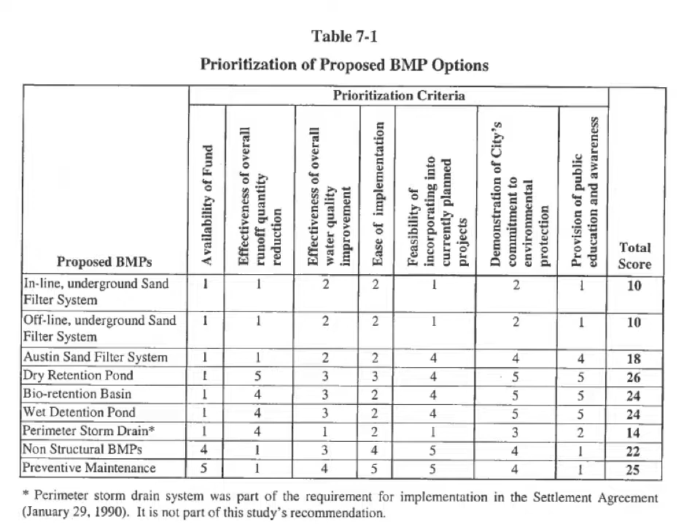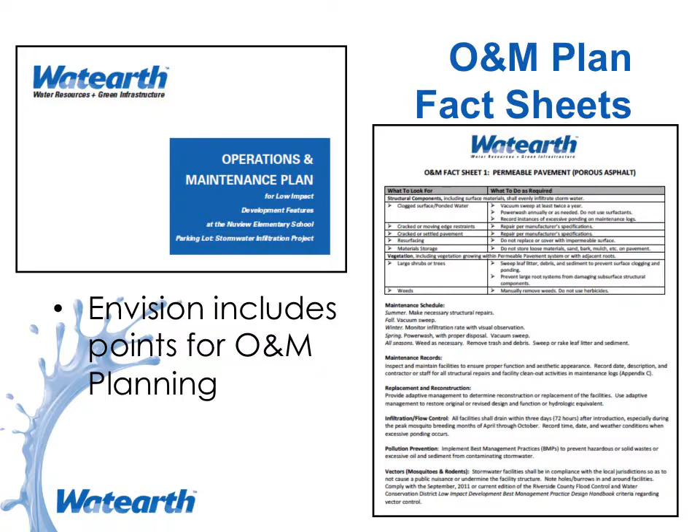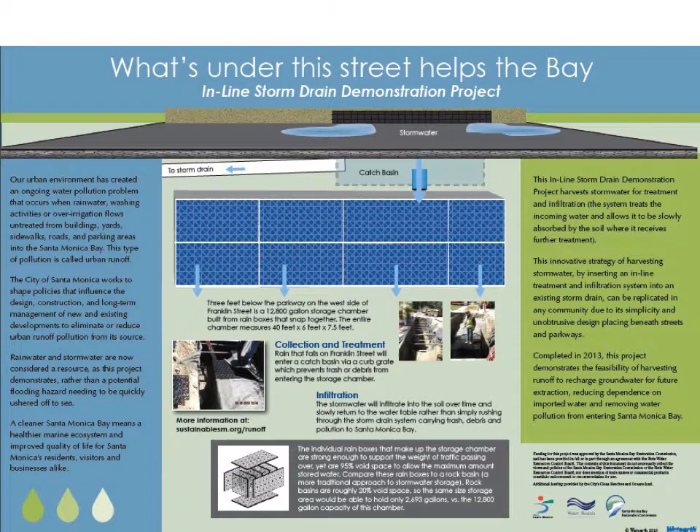This was for the City of Santa Monica for their BMPs maintenance manual. And so BMPs can range from, this is underground storage. This was done as a grant and demonstration project. It's below an inlet within the road right-of-way. And so it's manufactured storage cubes that retain water. So this is one type, and I'll show you a couple more examples, but this is one type of underground product that could be used in the Africa area to store the water to make up the river flow. This is a manufactured dry well, so it has some storage in it, but the idea is infiltration.

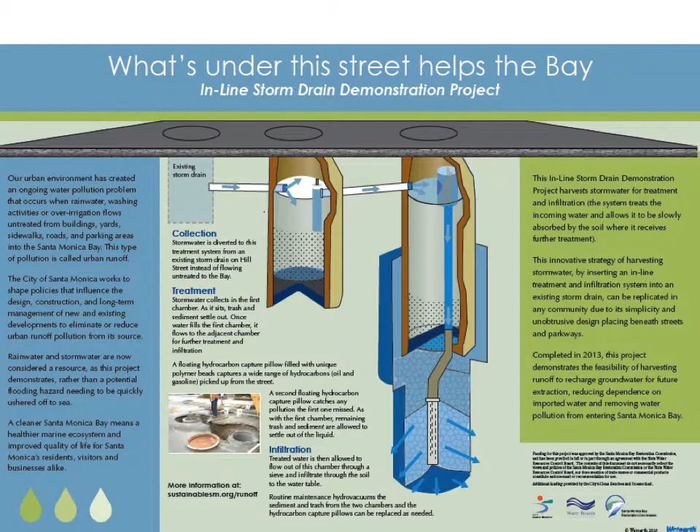How do you keep the permeable pavement permeable? Well, you have to do maintenance. We've actually had a couple of clients turn around and go forget about it, because the best thing we could find was like a billy goat. It's got extreme suction on it. But in time, the permeable pavement clogs up with all the fines and is no longer permeable unless you have something that's strong enough that can vacuum. Yeah, you have to maintain it with like a vacuum sweeper.

And then periodic. So depending on where you are, like cold parts of the country that have snow, generally there's going to be more times. If you have a heavy sediment load, you'll have to maintain it more frequently. Otherwise, once a year, twice a year, quarterly, vacuum sweeping. You think it can remain permeable? If it's properly maintained. Not like forever, but nothing's forever.

I mean, it can remain permeable unless it's in an area of a super heavy sediment load. Then you want to either not put it there or build in other pre-treatment BMPs, or have a redundant system where you know it's going to do its job. You know there's a lot of sediment coming in. You're going to maintain it, but you also have the overflow go to a different system kind of thing.

Yeah, so permeable pavers in the parking stalls here. Where's that? This is also in Santa Monica. I think it's at Virginia Park. So here's a sand filter under construction. So it's underground. It does an okay job of removal, but again, it's not going to provide other benefits like educational opportunities or aesthetics. So wet pond was one of the items.

Well, the other thing we found too is recovery. A lot of places we work with, you have 6 inches of rain in one event. So that field won't be any good for the next 3 days, because you have to get all the water moved away, and then the field has to dry enough to where it can be used. So it's a great dual use, but like everything else, something that does 2 or 3 things probably doesn't do it as well as something that just does one thing.

So yeah, I think that's probably true for the detention basins with recreation, but bioretention has so many pollutant removal processes and then provides the aesthetics and habitat. That's really my favorite. Yeah, the best BMP.

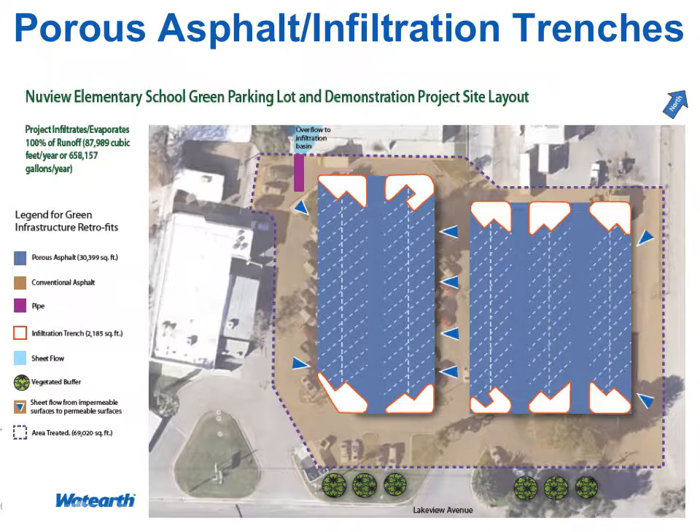So this is out in Nuview, and basically it was a parking lot. So similarly to the parking lot here, we retrofitted it, but the emphasis was on permeable pavement, and they wanted infiltration trenches rather than bioretention. So it pretty much infiltrates 100% of the annual runoff and also the 100-year, 24-hour event. But there is an overflow built in out into a play field, just in case.

So the one construction issue, we didn't do construction inspection on this. The prime consultant who did the solar did, but the one issue is the contractor. The idea with infiltration trenches and basins is that there's a depression to allow for storage. So they filled the rocks all the way up to the top. Still, probably the performance is there because you've got a lot of spaces in between, but that's the one thing. So the construction inspection and construction phase services, when you get into building these projects, are really important. Things like the permeable pavement, if it has some waves in it, that needs to be caught during the construction process.

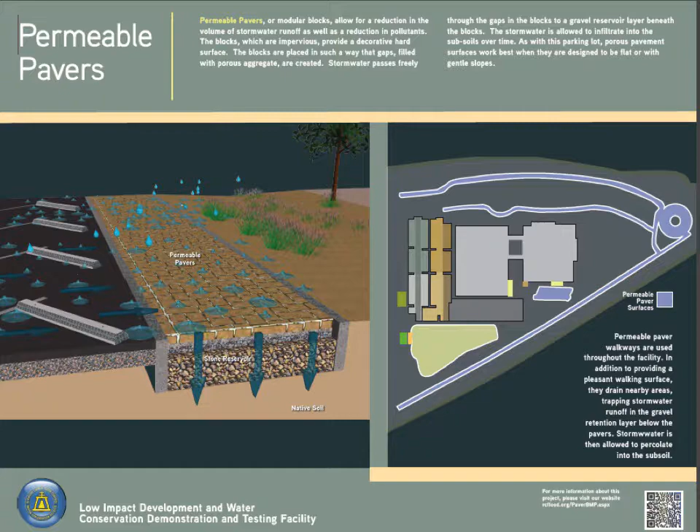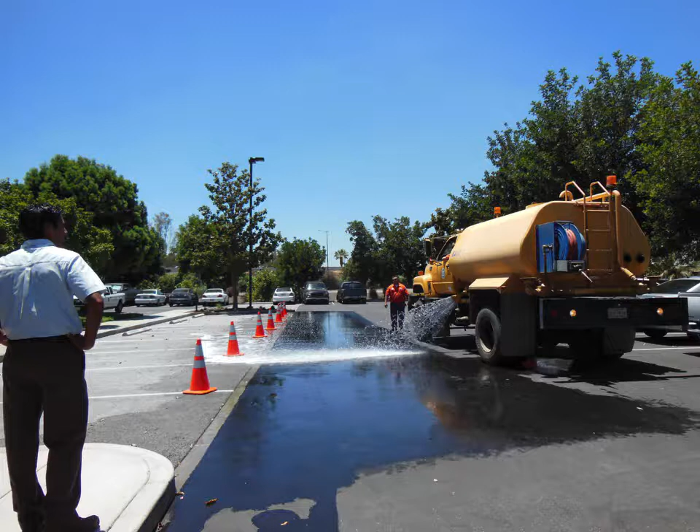This is at the Riverside County Flood Control and Water Conservation District. If you haven't been out there, they've got a great demonstration site and walking tour. So permeable pavers, porous parking stalls. That's the demonstration track, yeah. And the soil was very sandy and they lined everything to simulate a worst case scenario of what kind of performance you get. And it's still reducing runoff and providing water quality benefits. So in this case, it's the driving lane that's porous.

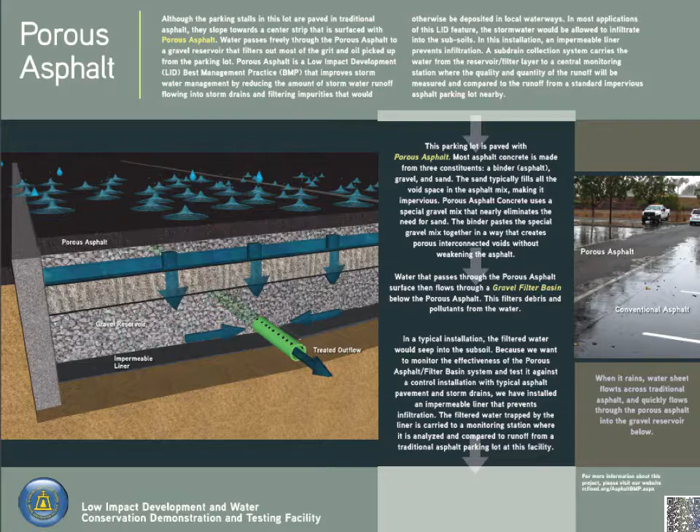So you see, I've intentionally included interpretive signs in this presentation just to emphasize, and I think several of you have mentioned the idea of the education and outreach and interpretive elements. I think that's really important, both to educate the visitors to the zoo and also to promote what the zoo is doing in terms of sustainability and green and conservation.

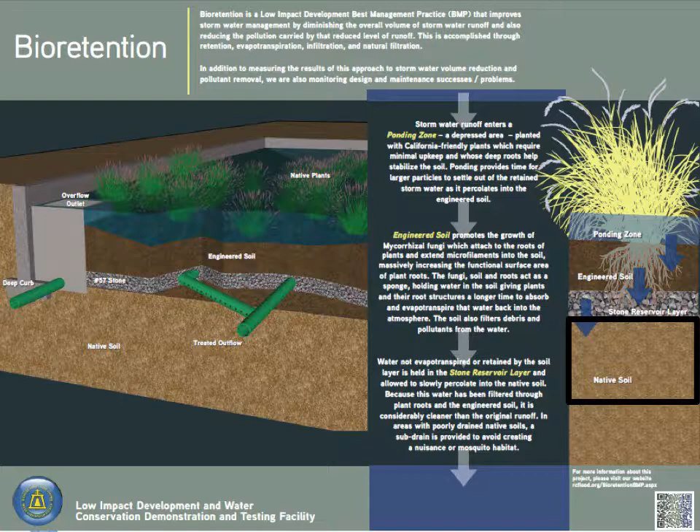Right, so bioretention is really my favorite because it does so many different things, but it's more of a distributed BMP, meaning you're not going to have one bioretention area to treat the whole of the Africa exhibit. It would be more like the parking lot where you have multiple bioretention areas. More of a centralized BMP would be like the large retention or infiltration basin, wet pond, those types of things. So this is also at the Riverside County Flood Control District, and it's the final place where water goes before it leaves the site, and it's their infiltration retention basin.

And do you have the statistics on how much treatment you get out of those bioretention? I do, or I can access them, but it hasn't rained very much since they built it, so there's not a lot of data. Yeah, but in general, theoretically? In general, yeah. There's been many studies. Certain things like nitrogen can be a little troublesome with a lot of BMPs, but there are design modifications, or sometimes if it's a concern, we can pair up a couple of BMPs.

It just increases the nitrate, is that what it does? Well, it depends. You have to be careful, don't use soils or compost with animal products in it, because that might tend to leach. And these types of systems don't really provide denitrification, which is required to remove nitrate, unless you can incorporate design modifications where you create an anaerobic situation below ground to help with it. But it really depends on what the pollutants of concern are.

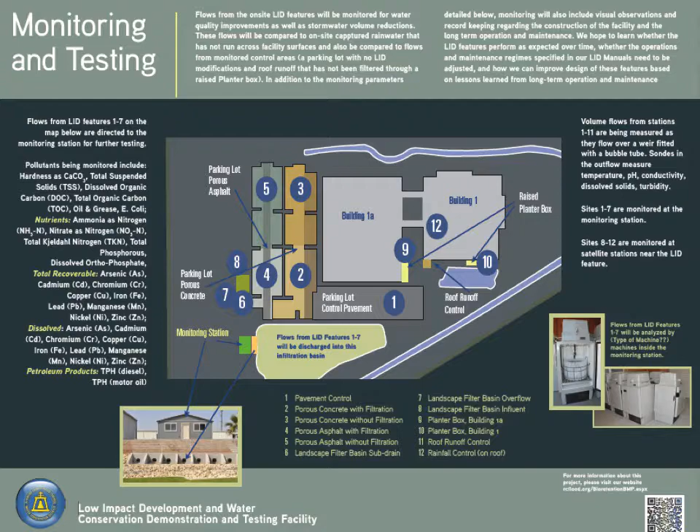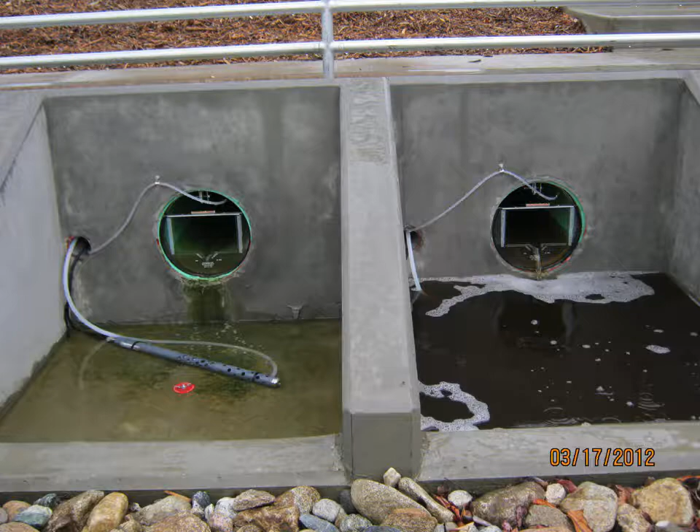How about phosphorus? Phosphorus removal is not super good with bioretention, but again, you can pair it with different products. So anyway, this whole site is very heavily monitored, with a special monitoring building. That's a probe? Yeah, I would think. And this is stormwater.

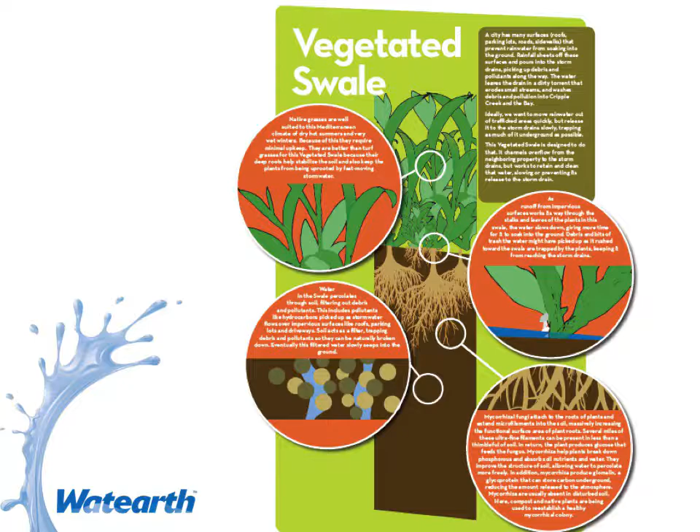And so again, the idea with the bioretention, just like permeable pavement, if sediment gets into it, sediment has to be removed. And that's the case with any BMP, whether it's manufactured or more of a designed natural system. But sediment will tend to collect on the top layer of the mulch. And so annually you remove and replace the mulch, and you're removing the sediment from the system.

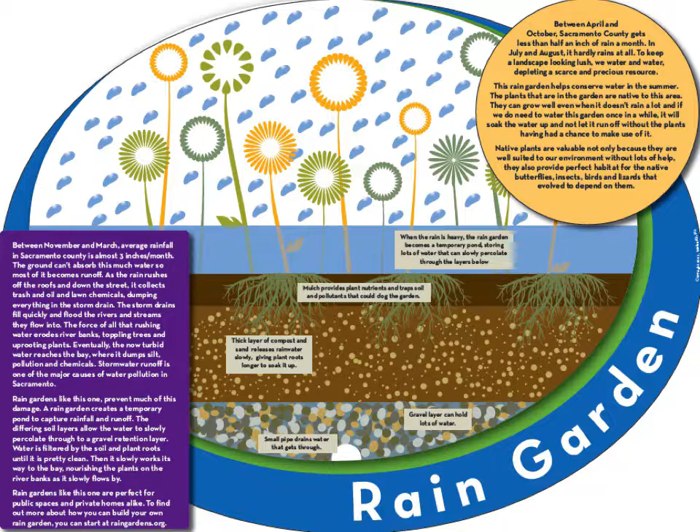But you have different processes that occur. You have mechanical filtration, where the sediment settles out by the time it gets about 12 to 18 inches down the soil column. You have phytoremediation occurring. You've got biological processes, bioremediation and biodegradation. But not denitrification. Not unless you're specifically designing for it.

And then porous pavement. So, again, you've got your pavement layer, whatever the material is, it all works about the same. And then some level of gravel. And the gravel is sized two ways. One way is based on what's required structurally. And then the second way is what goals are you trying to achieve? How much storage do you want? What are the infiltration rates? That kind of thing, to be able to balance the system.

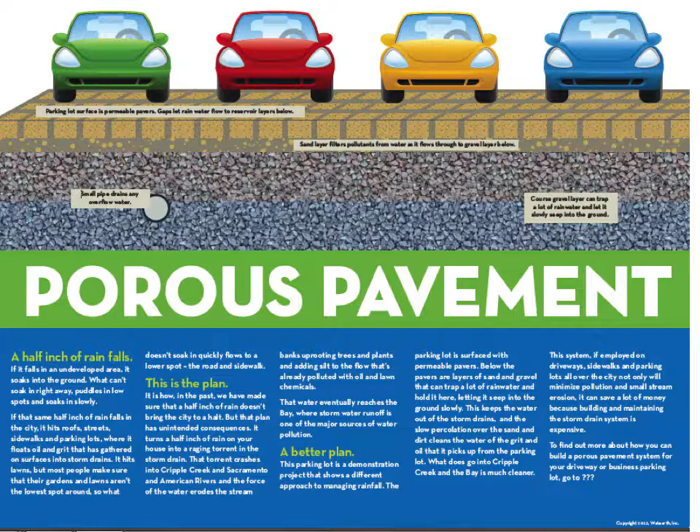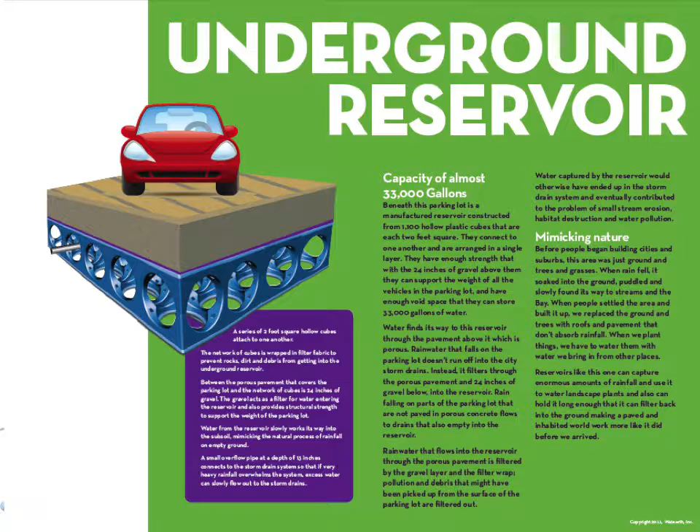So porous pavement can work really well in terms of managing the hydrology, and we can pair it with other products so that we're providing storage underground. So some products look like milk crates. These have circular cutouts in them. As mentioned, more like pipes and manifolds. There's a lot of different products out there. Here's this one under construction in Citrus Heights up by Sacramento.

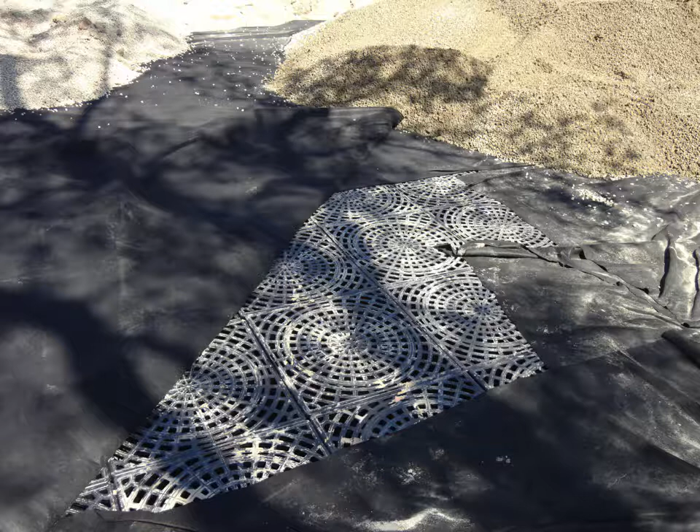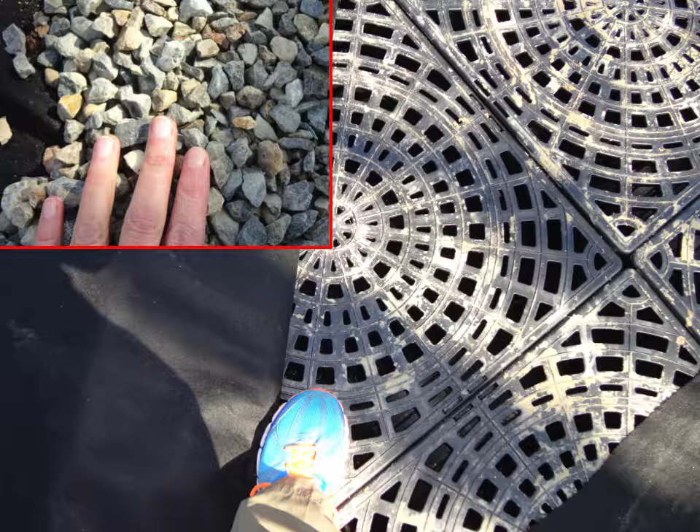And then this is the fire station I mentioned in Oakland. So the driving lane is permeable pavers. What's weird here is that the fire station personnel are supposed to maintain everything, and everybody knows that they're not going to. So this is one of these systems where they do a really good job with their trucks, but they're not going to be experts in maintaining BMPs, and they don't have a vacuum sweeper.

So this has a redundancy where there's a trench drain that drains out into bioretention that's actually sized to treat the entire site. So if the permeable pavement clogs, it's still there providing the structural support for the trucks, but we've got a backup.

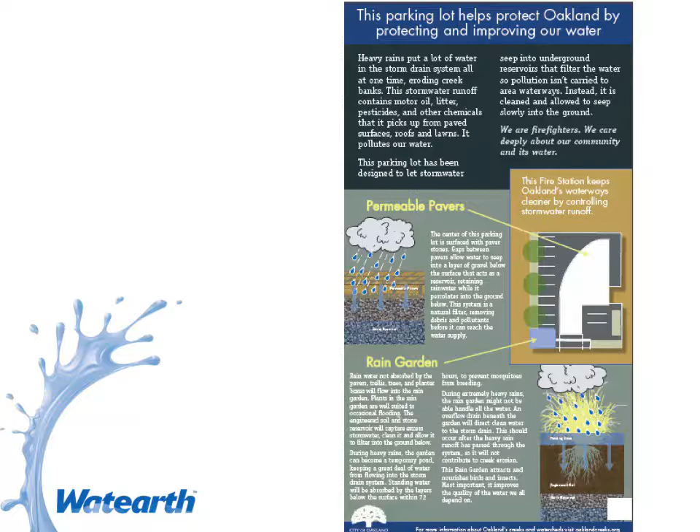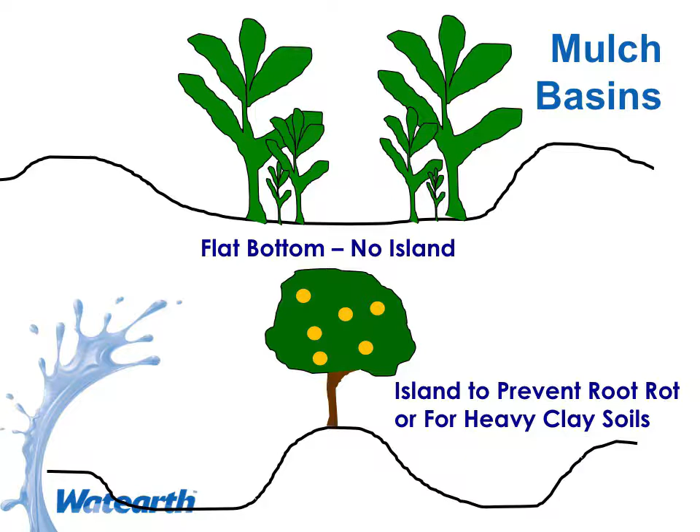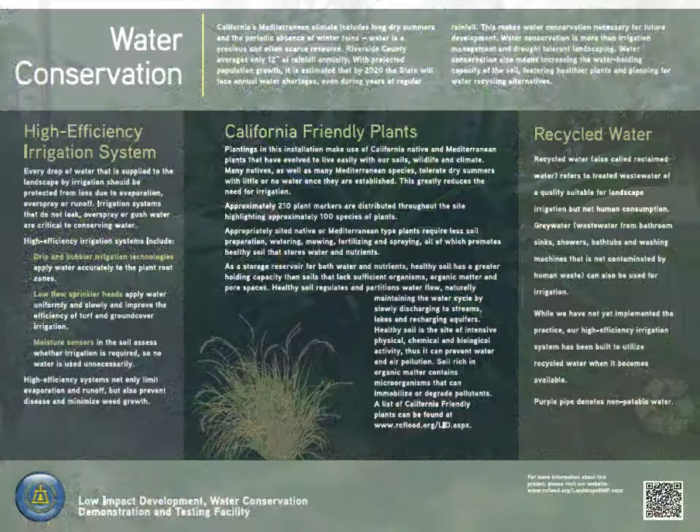And then I just want to point out, and I think that there's going to be different styles within the exhibits in the zoo, different types of water use. Of course, the California friendly, the indigenous plants, low water use are going to be really important in certain areas. But there are going to be areas where the theme of the exhibit is maybe going to require higher water use plants.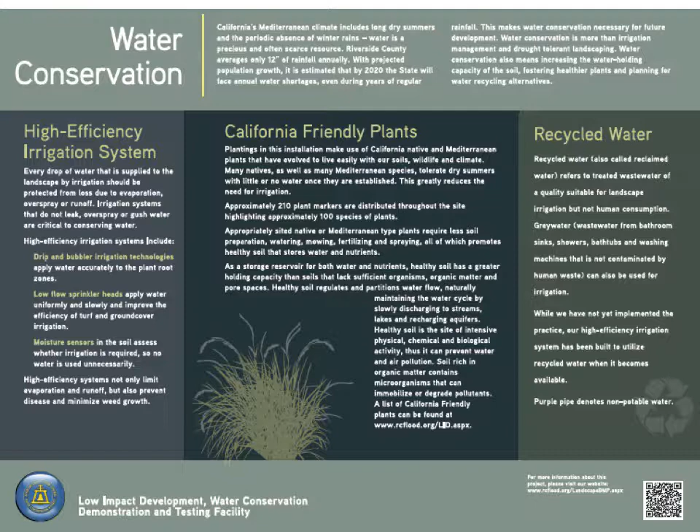And so we can balance that out with efficient irrigation, incorporating other conservation BMPs, and then also through the stormwater capture and reuse, better provide a source for the irrigation for the more water intensive areas. So I think in certain exhibits, if the focus is more on a part of the world that has more water, you want it to look like that.

And then again, keeping it very kid-focused, animal-focused. I think that pollutant removal and water quality benefits and hydrology benefits are important and can be emphasized, but also since it is a zoo, with the interpretive elements, making it about the animals in nature is hopeful and fun. So little rain barrels are cute exhibits, but they really aren't going to accomplish much.

So, if there's a way to work in some larger cisterns as a demonstration, but also where they can be functional. So they need to be able to collect enough water and be sited next to an area where there's a need. And it might be that toilet flushing is a more consistent need that works out with the cisterns.

All right, so a few final thoughts, just again, make it fun, make it educational, and make it relevant for the kids and the visitors. And I think there are a lot of opportunities to integrate water conservation and stormwater throughout the zoo. I'm super excited to be part of it, and just keep in mind planning for the maintenance down the road.